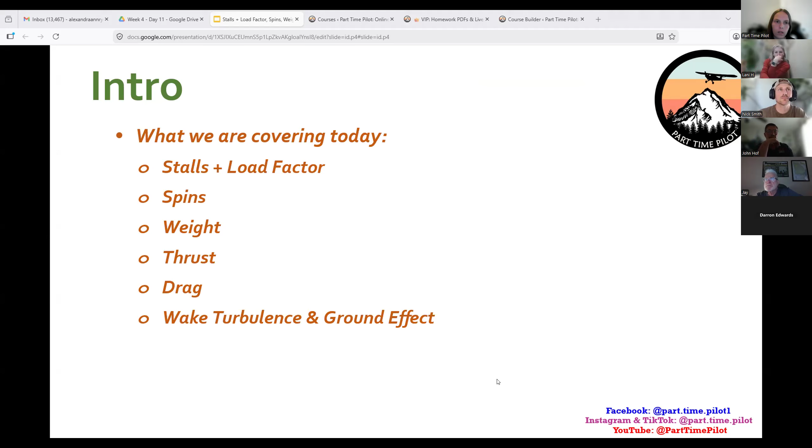While this is true, the speed at which an aircraft stalls changes with the configuration, the bank angle, load factor, and more. Therefore, it doesn't exactly explain what happens in a stall. But a stall occurs when we exceed our critical angle of attack, and to recover from a stall, we have to get an angle of attack that is less than the critical angle of attack, and the critical angle of attack can be exceeded at any airspeed or at any attitude.

And just to recap how we stall again. So we previously talked about the airflow staying attached to the aircraft wing and conforming to the wing shape. And this happens because of the surface friction between the air molecules and the surface of the wing in something called the boundary layer. So that's between the surface of the wing and the relative airflow.

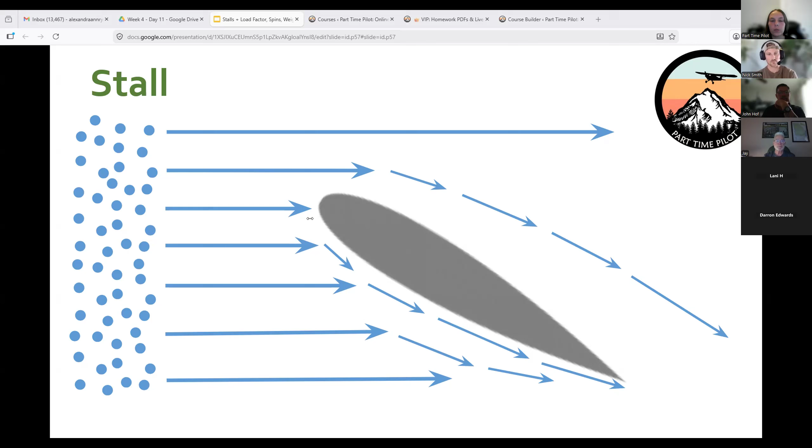And then as our angle of attack increases, the air on top of the wing has to turn an even sharper corner. When it does this, the momentum of the air eventually becomes too much such that it overcomes the force of friction, and the friction just isn't enough to keep it attached to the surface of the wing, and it detaches. And then what happens here is eventually we get to our critical angle of attack, where the air on the top of the wing can no longer stay attached, and it completely separates away from the boundary layer and grab of friction and turns into what we call turbulent flow.

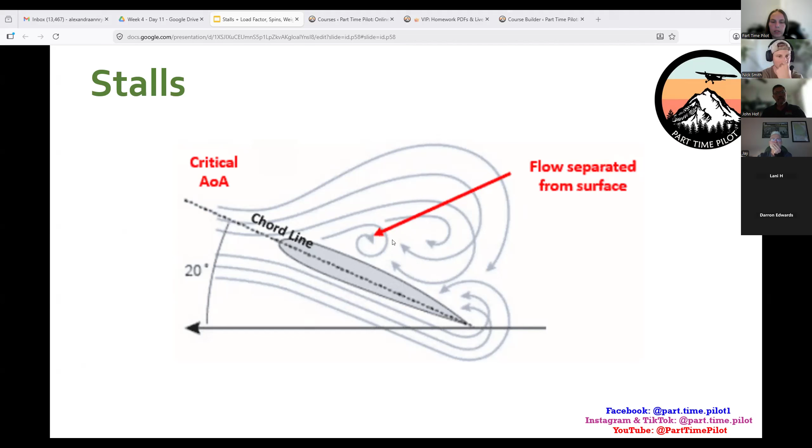And here's that visual depiction again, like we talked about from the other night. So we have our airfoil here. We start pitching up and up until we eventually exceed our critical angle, and then we have the eddies and the turbulent flow there depicted graphically. So are there any questions so far on the recap from the other night?

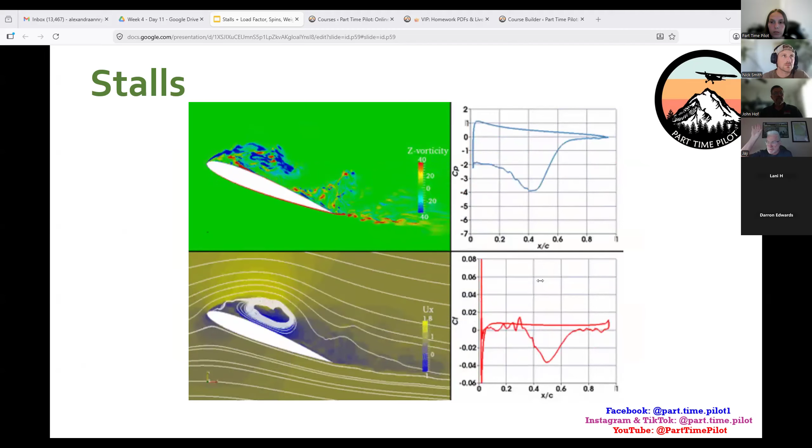I think that top picture in the green there, I mean, it kind of spells it out, because you see the blue when it's in the slipstream, so to speak, and then it just meets that critical angle and it just throws it off. It's pretty wild. Yeah, no, it really is. And if you've ever been up with your instructor doing stalls, it's a pretty fun maneuver to perform.

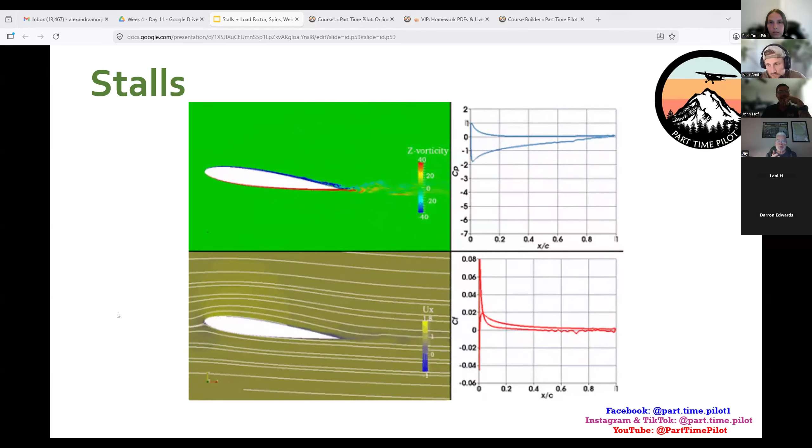Did you have a question, Jay? Yes, quick question, and I think you mentioned it, but you can stall the wing out depending upon speed, weight of the aircraft, but when you reach that angle where it stalls and loses lift, it could happen whatever you're doing to the bird. In other words, whether you're climbing or you're coming in or you're making your turn in for your final, as long as you stay in a stable attitude and you keep the airflow on the wing, you're good to go. But if you violate that, this can happen, and that's bad news.

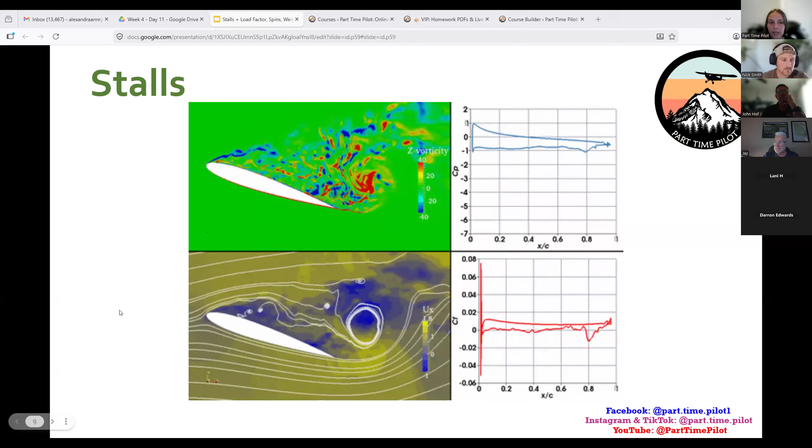Yeah, so if you exceed your critical angle of attack at any point, it doesn't matter, you'll stall the aircraft. Okay. All right, thank you. I'll leave it at that. Thank you. Okay. All right, so now we're going to talk about what John was kind of hinting at earlier with the load factor in our stalls.

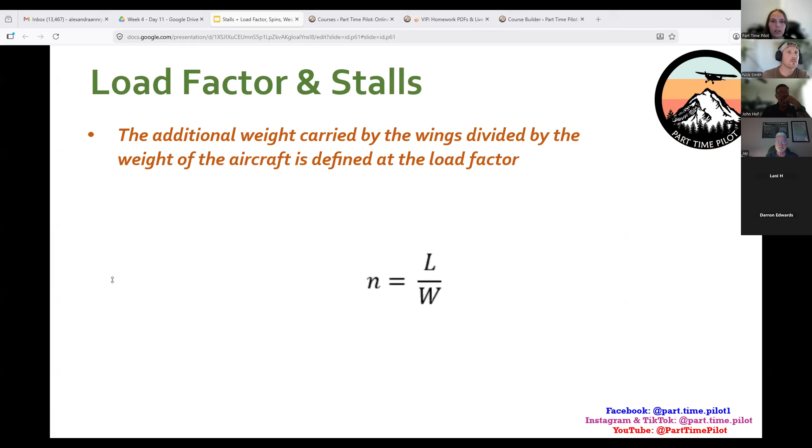And the additional weight carried by the wings divided by the weight of the aircraft is defined as our load factor. And here's a nice equation that we have. Don't worry about the equation, though, or memorizing it. This is just something that Nick added to kind of give a little bit of the why behind load factor. And it relates to load factor, and L is the lift and the weight force is on the bottom. And then the load factor, there's the lift over weight.

Is it lift over weight? Or was it load over weight? It's lift. So N is the load. Yeah, N is load factor, and so the ratio of lift to weight is equal to your load factor or your G forces. Yeah, so this is what you would use to calculate how much G force your aircraft is pulling at the time of your maneuver.

So for this example, if lift and weight were equal to each other, which we would need for straight and level flight, we would have a load factor or a G force of 1. So as you can see, if my lift and my weight were equal, we would have one load factor, or 1 G we would be pulling. But let's say if we increase the lift compared to the weight, the G-force increases. So think of a fighter jet that increases the angle of attack and speeds up. This would increase the lift significantly compared to the weight, and the pilot would feel those Gs.

So I know we'll probably get into this later on in the course, but when we're doing steep turns, for example, that's another maneuver where you feel the load factor a lot. And when you're banking over to 45 degrees, you can feel those G forces as you are doing your steep turns. So in this case, we increased our lift to 10, our weight's still 5, but that doubled our load factor or G's that we're feeling.

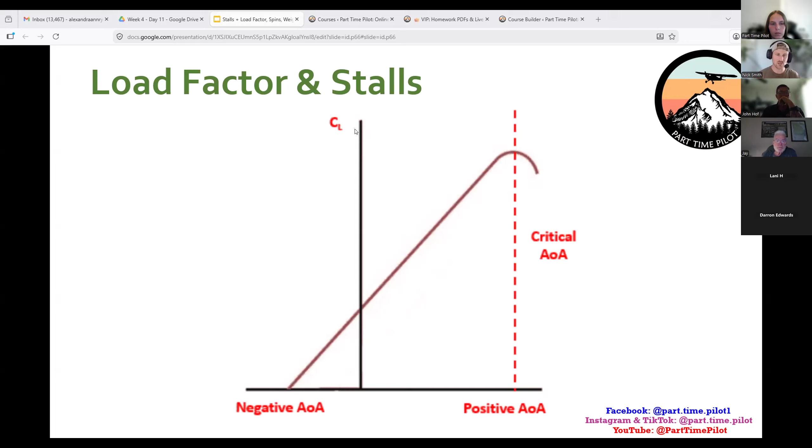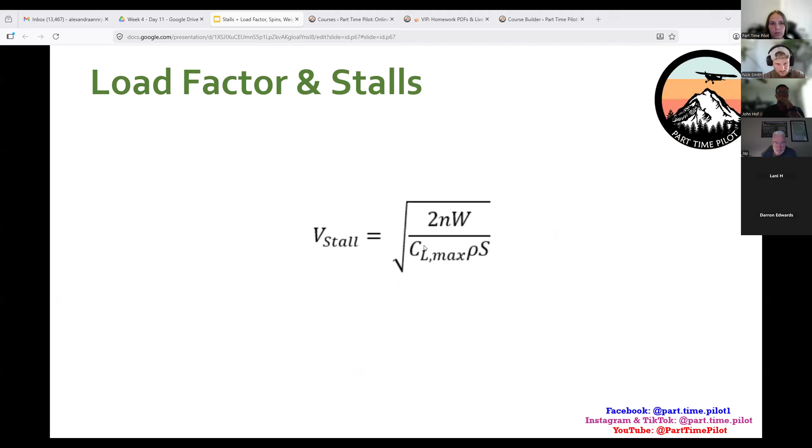So that point at which we reach the critical angle of attack matches up to the point at which we get maximum lift, right? And Ali, if you go back to the equation, 2 slides, I think. Thank you. So there's a CL value in this equation. So if we plug in the exact CL value of the CL max, where we have our max angle of attack, now go forward like 3 slides. So if we plug that CL max in, we get this, and the velocity or the airspeed we get at that exact point is going to be our stall speed.

So remember, VS and VS0, when we have stall speed, it's different whether we have flaps down or not. And the reason why it's different is because that S value on the bottom of the equation changes. When we lower flaps, we essentially increase our wing area. Relative to the wind, it looks like it's bigger because they kind of extend out and extend the wings. So that's why it's different with and without flaps.

But what I want you guys to realize is that our stall speed, now this is an equation for stall speed. It is the speed at which we reach that maximum angle of attack and maximum lift, that CL max. And it's a factor of N. So if N goes up, right? If N goes up, our V stall is going to go up. So the speed at which we stall is going to go up. And so that means if our G forces go up, our stall speed goes up. Yeah, so I think that's it. Ali, actually go to the next slide.

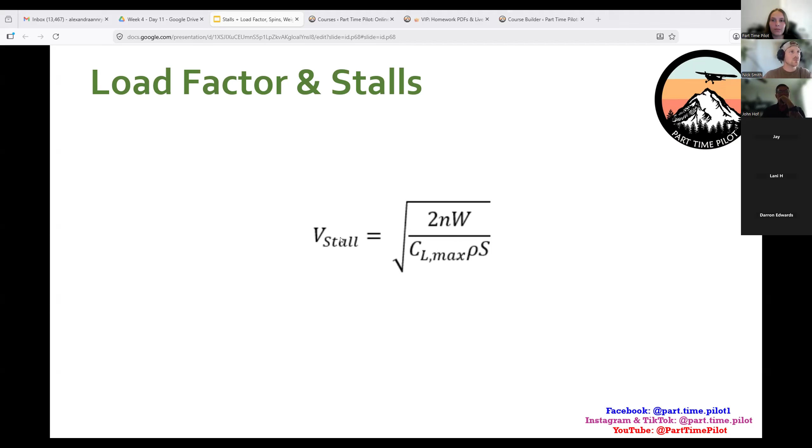So we want to be aware of things that increase our stall speed, especially when we're flying at slower speeds, like during takeoff or landing. A lot of trainer aircraft have a stall speed around 54, 55 knots for VS1. So that's straight and level flight, right? That assumes our load factor is 1. And then that same aircraft will also have an approach speed, the speed at which we want to fly as we come down to land, of like 60, 61 knots. So it's not that far off.

So if we just increase our load factor a little bit, that will increase our stall speed enough. Let's say we're on an approach, and we're 2 knots under, we're a little bit slower than our approach speed, which is very easy to occur. So we're at like 59 knots. And then we have to, for some reason, make a turn, or we get a gust of wind, or something changes our G forces and increases our stall speed to above 59.

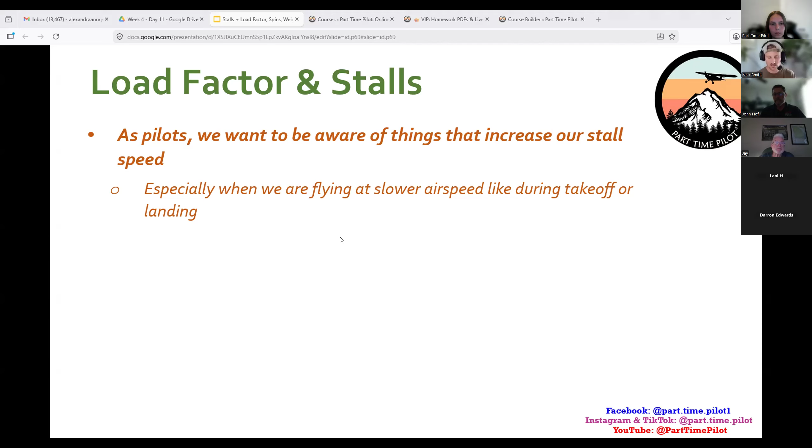That means we are going to stall when we are above our stall speed. We've reached, according to the relative wind, our critical angle of attack and our max lift. A lot of aircraft don't have an angle of attack indicator, but they do have an airspeed indicator. So that's why we use stall speed. And then if you go to the next slide.

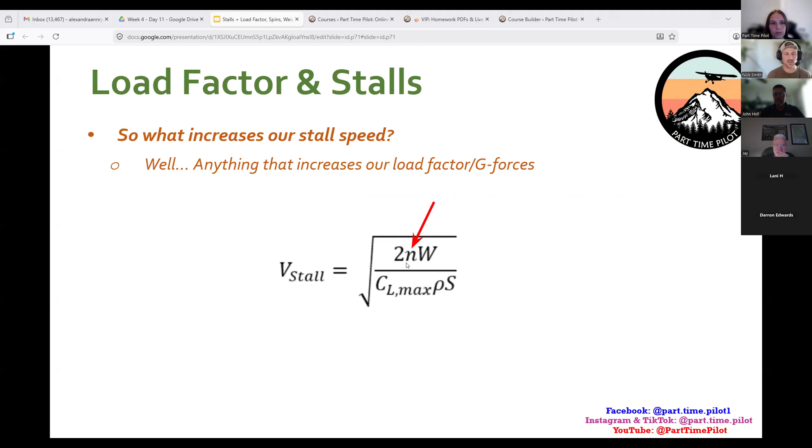So we want to know what increases our stall speed. And then the next slide. I mentioned N already. N is our load factor. That increases our stall speed. And so what increases N? So if you go to the next slide, and then I'll let you take it from here.

Okay. So what increases that is our bank angle. The steeper we bank, the more load factor on the plane. And I remember when I was in school learning this, we had the V speed chart, which is in the PHAK or something. It talks about the different V speeds, but it also talked about the bank angle. Essentially, if you bank all the way over to 60 degrees, you're pretty much doubling your load factor there.

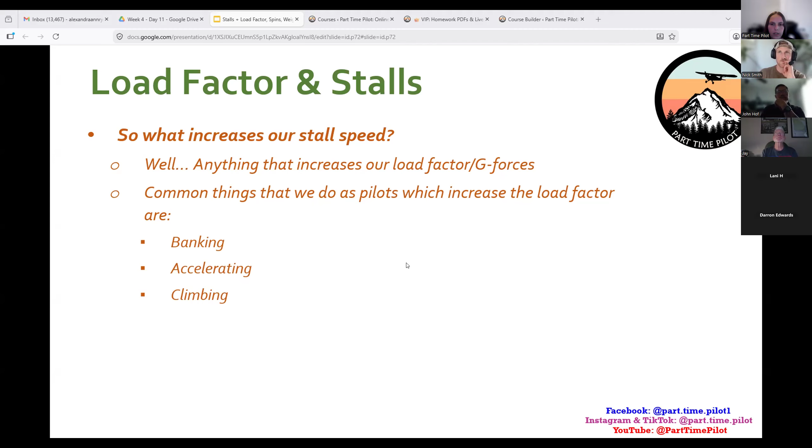Also accelerating. So when you see the fighter jets accelerating super fast, that's going to increase lift exponentially. And therefore, the faster you're accelerating, the higher you might get to the point of your critical angle of attack and where you're going to stall. And also climbing, that's going to increase your load factor too, because you're putting more G's on the aircraft when you're climbing. So that's going to also increase the speed at which we stall.

Yeah, Ali, what do you think the average bank angle range is for a student pilot? So when we're doing steep turns, the furthest we bank to standards is 45 degrees. But I probably wouldn't let a student go past that. If you're just doing stalls, we would usually just keep them wings level where I did my training, and with my check rides, I didn't have to stall in a bank.

I know it's up to 10 degrees of bank. I think you can have the wings banked in a stall. It depends on the DPE, but you can technically do power on and power off stalls in a bank, but I probably wouldn't let them do more than 10 degrees of bank with stalls, because you're further putting load on the aircraft, and if they don't recover properly, you could get into a secondary stall or potentially a spin. So, right.

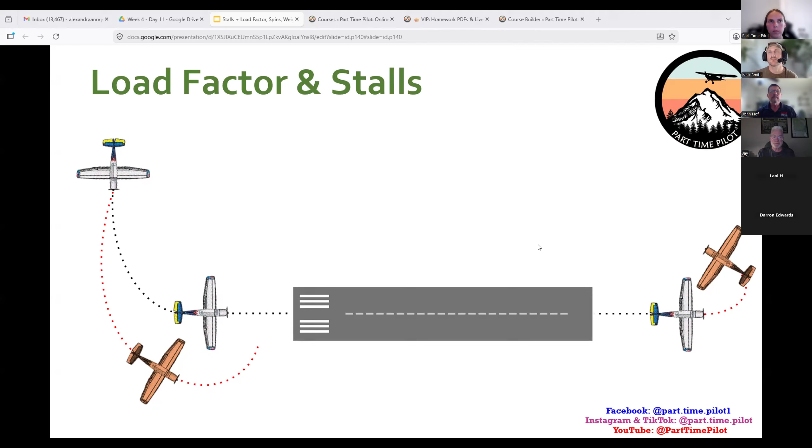Because you're putting more load on the aircraft. You're at a slower speed. You're close to your stall speed. So it gives you that feeling, and it's a very weird feeling. It's a little bit mushy too, especially when you're that slow. So yeah, try and have your instructor demonstrate that stuff to you, and you'll eventually be doing that as well for your primary training.

All right, and then we're going to talk about how to recover from a stall next. So with this example here, when you stall, your stalls start at the wing roots before they propagate outwards, because they designed the aircraft this way to make it easier to recover from a stall. If the wings were to stall at the tips, it would be harder to recover from versus the root.

And so in the turbulent flow of a stall, the control surfaces become less effective. So airplanes are designed this way with the shape and the twist of the wing because it is advantageous that the stall occurs the furthest away from the ailerons, allowing them to remain effective in the stall. If we were to stall out by the ailerons, we wouldn't be able to control them as much, and therefore we wouldn't be able to recover as well. So that's why they've designed the aircraft to stall at the wing root instead of the tips.

And so to recover and prevent a stall, we must reduce our attitude immediately to get below that critical angle of attack and gain airspeed and flow over the wings again. This is done by pitching down. So the first thing you want to do is pitch down to break that critical angle of attack. Then the other parts of the recovery process depend on if you are in a power on or a power off stall. For a power off stall, this is going to be simulating a landing stall. So typically you're going to have full flaps, and you're going to want to disconnect the autopilot and assume manual control if applicable.

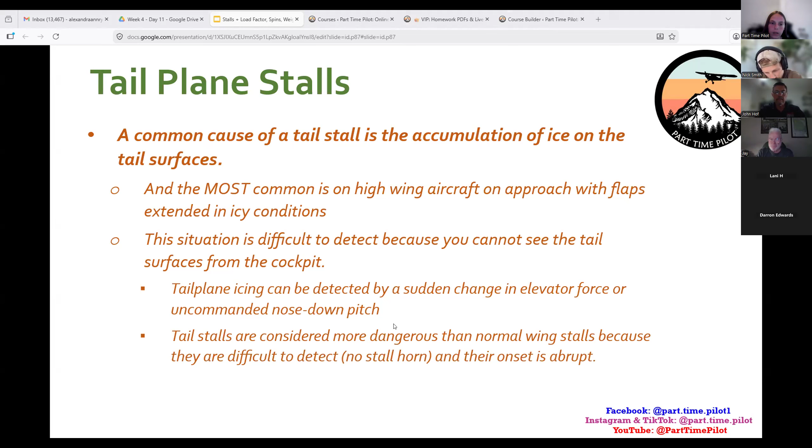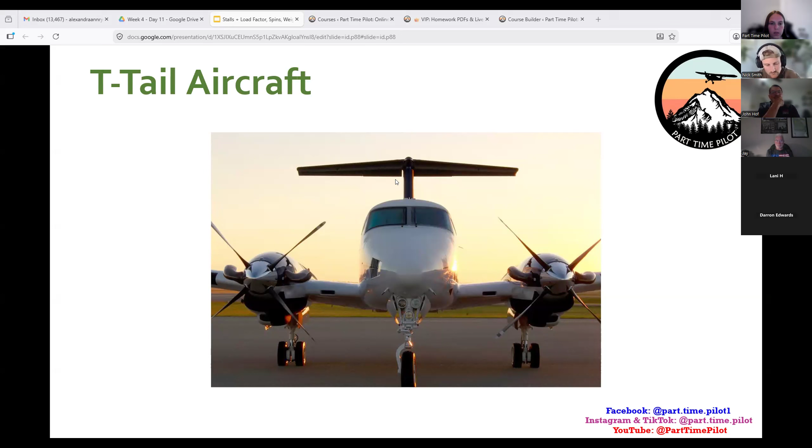In terms of a stall, a T-tail aircraft is more susceptible to entering a deep and more dangerous stall at a higher angle of attack and low airspeeds. This is because at a very high angle of attack, the wake vortices of the wings encompass the T-tail, making the elevator almost completely ineffective. As you can see here, being at a high angle of attack, the vortices are hitting the back of the T-tail and making it pretty ineffective to control. That's why it's very dangerous to stall in a T-tail aircraft, especially a jet, because you might not be able to recover from it. Are there any questions on T-tail aircraft?

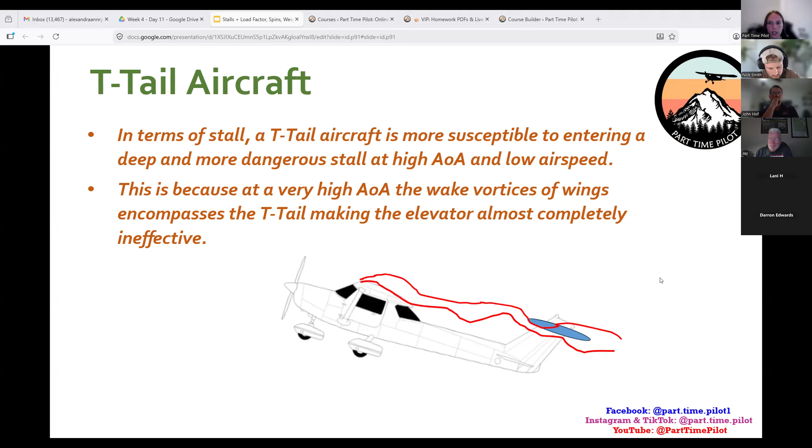All right, next we're going to talk about spins and the difference between a spin and a spiral. A spin is a stall with autorotation about the vertical axis that is caused by a stall plus a yaw simultaneously. An aircraft spiral is a steep descending turn in which the airplane's nose drops and its airspeed rapidly increases as it continues to lose altitude in a tightening spiral.

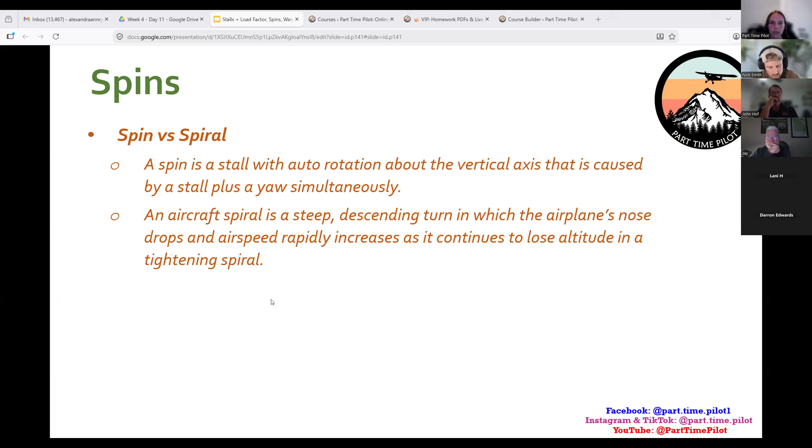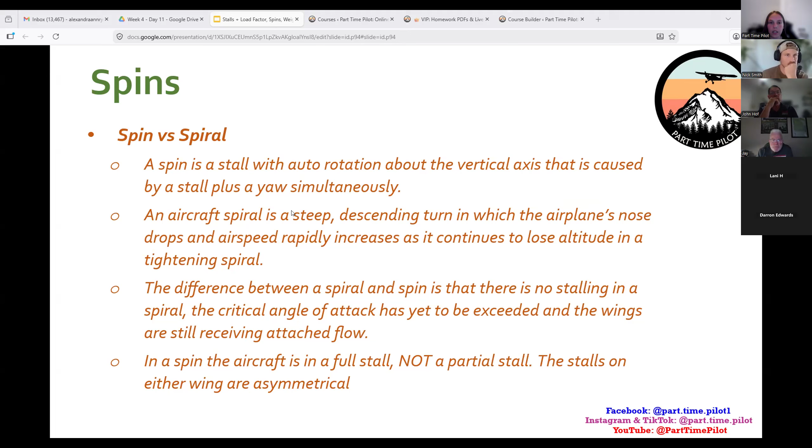The difference between the spiral and the spin is that there's no stalling in a spiral. The critical angle of attack has yet to be exceeded, and the wings are still receiving attached flow. But with the spin, the aircraft is in a full stall, not a partial stall. The stalls on either wing are asymmetrical, and a spin can be entered from any flight attitude and from almost any airspeed. And this is a visual representation of a spin.

If you are going to spin an aircraft for whatever reason, make sure that it's in an airplane that's rated for it, and make sure that you're going up with an instructor who's qualified to do this. You typically won't do spin training in primary flight training. You typically do this once you go to CFI.

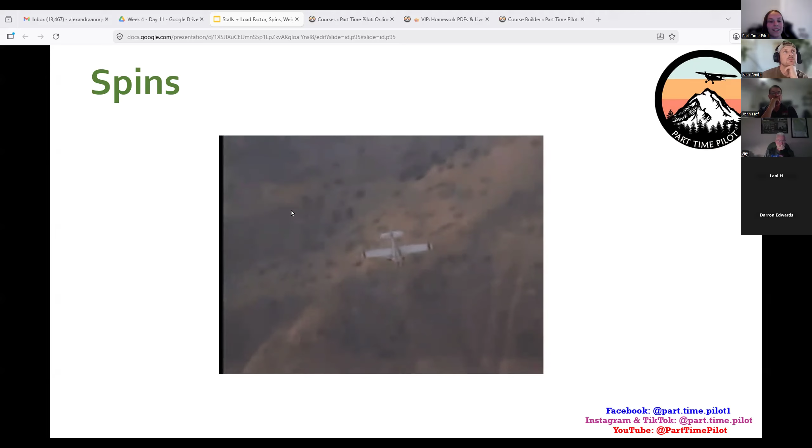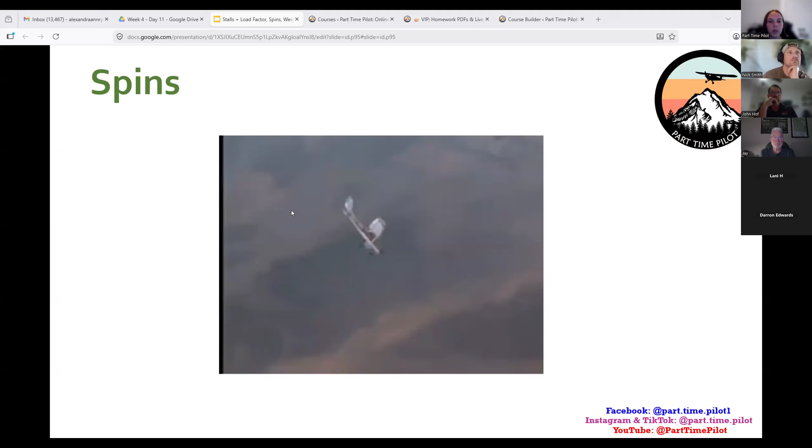When I was in CFI, I had one spin flight and it felt crazy. We were doing them over the ocean because I was in Florida, and I accidentally looked down, and that was the only time I felt kind of sick in the plane, because you feel the G's so much when you are spinning. But most GA aircraft are inherently stable, so they don't want to spin. You actually really have to manhandle these things to spin and put it in some crazy maneuvers.

I do remember from CFI training, if you failed spins or failed teaching spins on the check ride, you'd have to take an airplane that was rated to spin and perform a spin for the examiner. Luckily I didn't have to do that. But yeah, it's really wild. It's a fun feeling, but it is definitely a lot more G-force than I thought it was going to be. And it is very hard to get it into a spin.

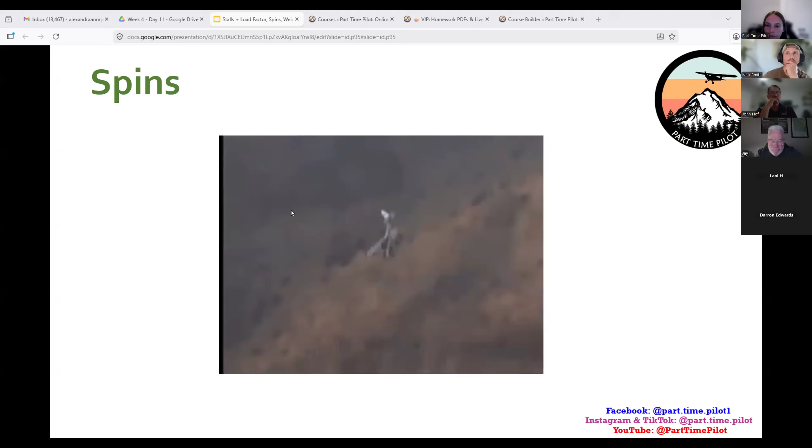Yeah, it'd be wild for spins to be common. It's probably because you only get introduced to spins, like the acknowledgement of spin recovery, because the majority of general aviation aircraft aren't rated for spins. And I think that's why they don't have you spin on the commercial check ride, but you don't have to spin on a private check ride for sure. You just have to know how to recover from a spin. And we'll get to that in just a second.

So we're going to bring back our base to final turn again as another example for spins. This is another common area for a pilot to get into a spin as well as just a normal stall. Unfortunately, this usually ends up in a crash due to the average spin recovery needing up to 1,200 feet of altitude. When you are low and slow, you want to avoid uncoordinated turns at all costs.

So when I went up for my spin flight, we went up to 6,000 feet AGL and we spun there. But yeah, it does take about 1,200 feet, sometimes even more to recover from a spin, depending on how aggressive the spin is. You do lose a lot of altitude when you're trying to recover from a spin. So that's why when we do demonstrate them, they are pretty high up.

And then another time it could occur is after takeoff and the pilot's trying to make a hard bank either to return to the airport or for an emergency. And with back to the airport, that would be that impossible turn like we talked about earlier. So making that impossible turn, you could already be stalled, and then you try and bank harder, then you're going to just spin the aircraft.

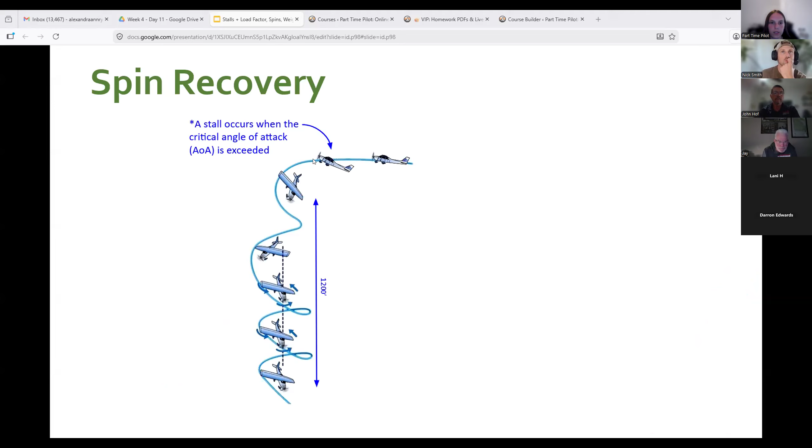And so with spins, all we really care about here is the recovery from the spins. If you, for whatever reason, were in a spin, you'd have the stall that occurs when you're at the critical angle of attack, so at the top here. Then the wings are stalled, and thus the flow over the wing is separated, and that means the ailerons are not as effective as in normal flight, and the nose drops, as you can see here with the plane. And then after that point, the stall causes the nose to yaw, and the yaw and the stall asymmetry causes the auto rotation.

And so to recover, if you're in a high wing aircraft, you'll use the acronym PARE, where P stands for power, and that means you're going to immediately reduce your power to idle. The asymmetry of the stall and the yaw causes the auto rotation of the spin, and the power from the aircraft's propeller is aiding in the rotational speed of the aircraft. Therefore, the first thing the pilot should do when they realize they are in a spin is to reduce the power immediately because we want to stop the rotation of the aircraft.

The next thing you're going to want to do is level your wings. So A is going to be for your ailerons. You're going to want to level your wings with ailerons neutral. Neutralizing the ailerons means to center the yoke with no left or right input. A pilot should not try to bank or use ailerons to recover from the spin because it can just make the spin worse. So that's why leveling your wings and neutralizing your ailerons is good, because we're trying to break that spin, break that rotation.

And then the R here is rudder. What you're going to do is put full rudder against the direction of the spin to combat the rotation of the aircraft. So if I'm spinning to the left, I'm going to want to use right rudder to stop the direction of the spin. So you're going to use full rudder to the floor.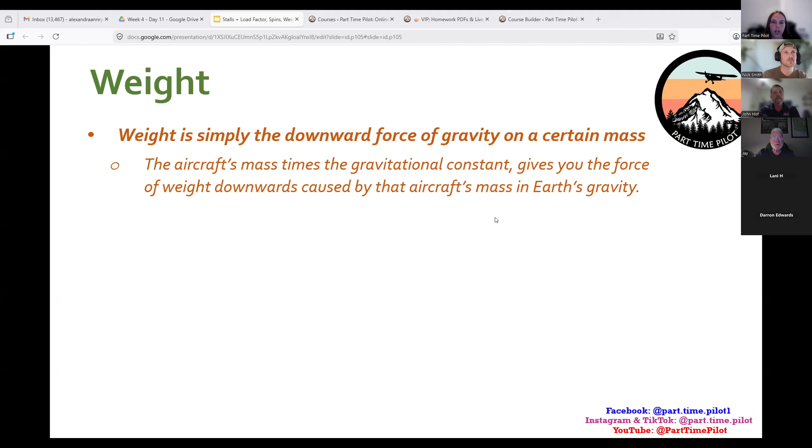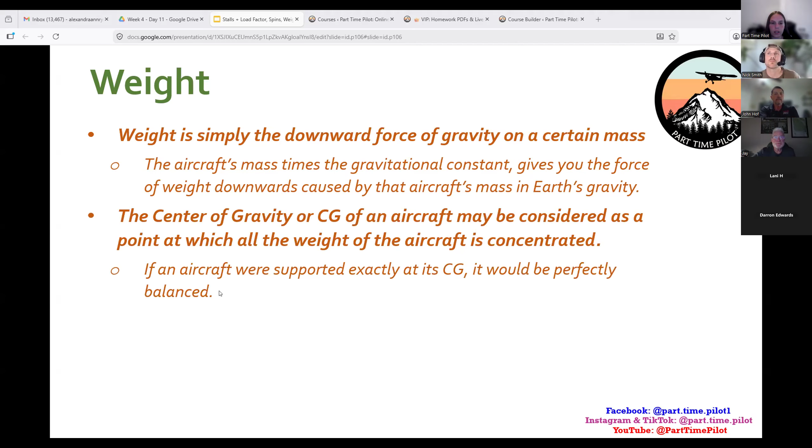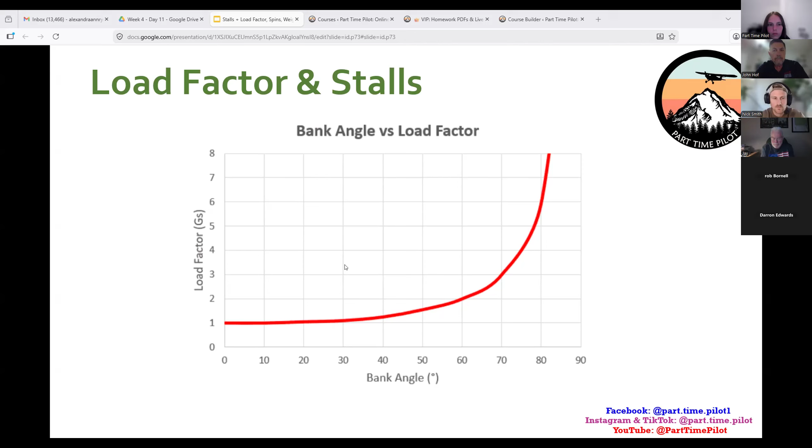I was taking, I think it was the stalls quiz, and then that popped up by like the third or fourth question. Then I stopped taking the quiz because I don't know how to calculate those. Right. I kind of forgot about that one, to be honest. There's a couple of them in there I had to stop and say, well, I'll go back, might be on tonight's lessons. That's a good question. Maybe we'll do a couple examples on Friday after you guys give it a try in the quiz. I'll make note of that for Friday.

So I'm sure those are going to be some of the questions that would probably come up on the FAA written, how to do this. Yeah, I think I remember I got one like that. They're pretty easy once you figure it out. The graph looks intimidating, but it's really not. You just line it up and then you take your load factor and you times it by your weight. Okay, and then John says there's 3 different questions on the quiz like that. We can practice those on Friday too.

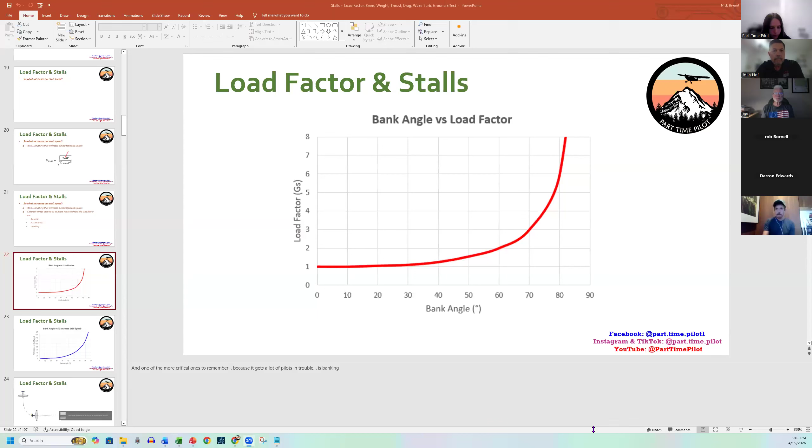So real quick, I know we got time, but since it is on the quiz that they have to do, I feel like we should show them. Can I take over real quick? I just want to do another example. Yeah, of course. All right, so share this here. Can you guys see that? Yes. Okay, cool. John, I think you were looking at the questions. Do you want to tell me one of the questions?

The one that Rob was talking about, and then there's another one that says something about if your plane weighs 3,300 pounds or something, but I forget what you had to calculate. There's three different ones where you have to use some type of formula. One you have to use the square root of the G force, and then I can't remember what you have to do with that. I think you have to multiply it back in or something like that. You said it was in the stalls quiz? Yeah. Okay, I think, is it this one?

If an airplane weighs 3,300 pounds, what approximate weight would the airplane structure be required to support during a 30-degree bank turn while maintaining altitude? Exactly. Okay, so 30-degree bank, and it weighed 3,300 pounds. And it's asking what weight would the structure need to maintain. So basically what it's saying is that in straight and level flight, when our G forces are 1, the structure needs to support a 1G weight of the aircraft.

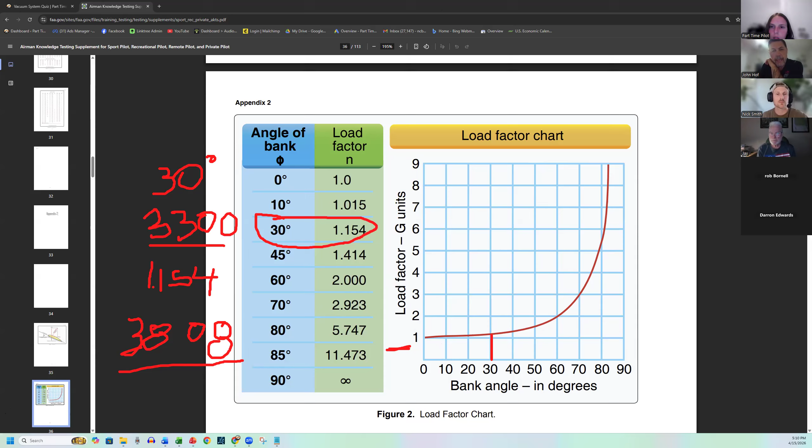Any questions? No, that makes sense. Okay. John, you said, Allie, you're looking at the questions. John said there was one about a square root. Yeah, I'm gonna look for that one too. Let's see. I think it was a square. It was calling for 2Gs, and you had to get the square root of 2. Okay, let me see. What is the approximate stall speed during a 2G load factor bank when the aircraft straight and level stall speed is listed at 50? Is that it? I believe that's correct. Okay.

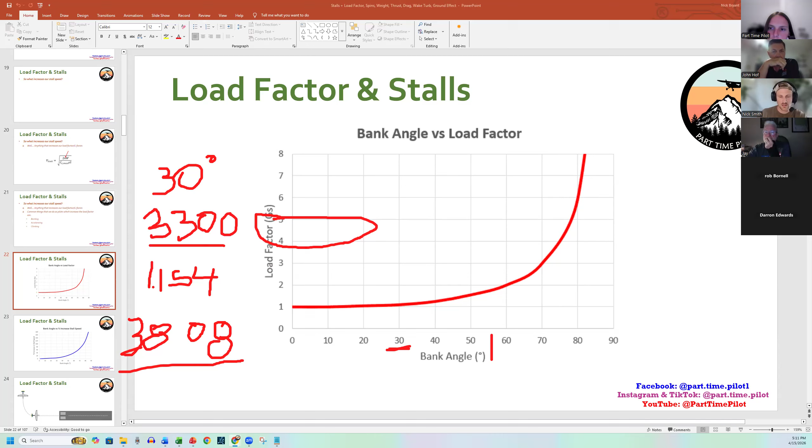You want to? Yeah, I'm gonna pull it. Okay. I'm gonna put it in the chat. Okay, thanks. What is the approximate stall speed during a 2G load factor bank when the aircraft straight and level stall speed? Does it give a figure number? Let me go back and see. No, it doesn't. Okay. What is the approximate stall speed? I'm trying to figure out where we were going with this 2G load factor.

I'll let you continue, Allie, and then let me look into this. I just want to make sure I don't go about this the wrong way. You're good. I'm gonna take a look at it on my end. And then I see the notes, but yeah, that's good. Let me get back to sharing my screen. All right, can everyone see my screen again?

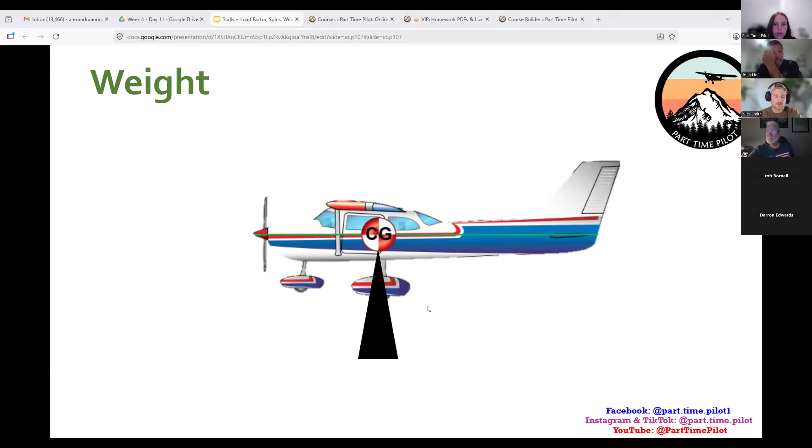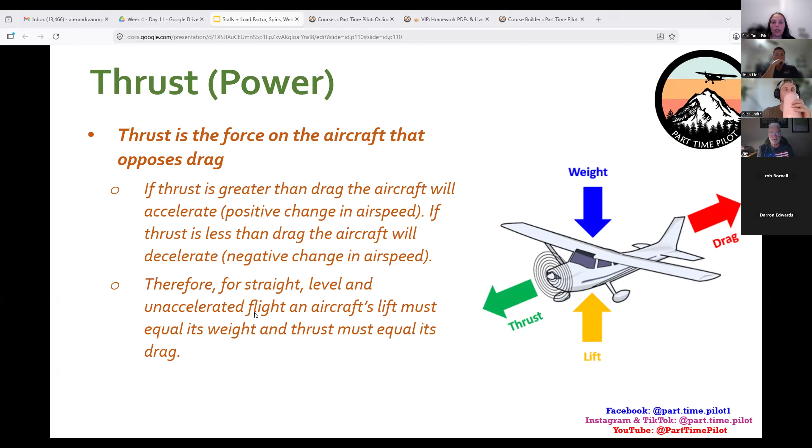And pilots add thrust by adding power and increasing the RPMs on their tachometer. And in each of these cases, you are targeting a safe airspeed and will be taught to pitch for airspeed and change power accordingly. The two always work in coherence with each other.

So if you've ever heard your instructor or someone say pitch, power, trim, you want to pitch for the attitude you want, whether that's straight and level flight, a descent, or a climb. You want to pitch for that first. So once you have the attitude that you want, you keep it at that pitch. Then you're going to add power to maintain that, whatever power setting you need to maintain straight and level flight, or whatever power setting is needed for a climb or a descent.

So in those cases, you may be adding or taking away power depending on the conditions for the day, that sort of thing. So you're going to add power to maintain that position. So that's where the word power comes into play. And then with trim, remember, we are using trim to relieve the control pressures from the pilot. So you're either going to add nose down trim or nose up trim, depending on if you're in straight and level flight or descending or climbing. So whatever you need to maintain that, you're going to add trim as necessary.

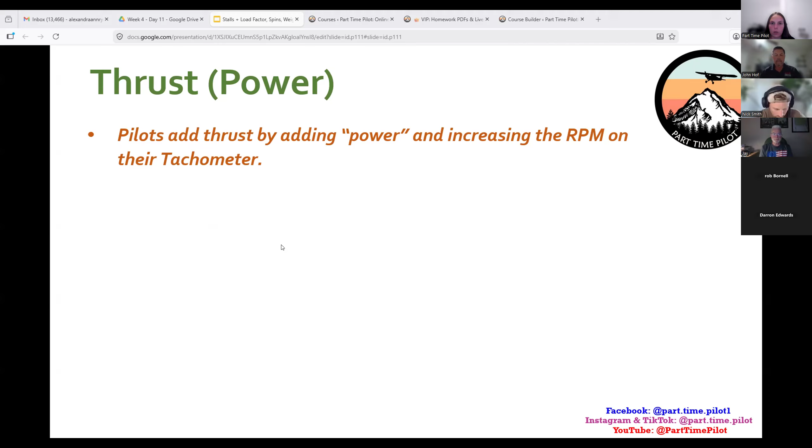So anytime you go from straight and level flight, you're going to need to adjust your pitch, your power, and your trim. So that's just three big things you're going to want to keep adjusting all the time in flight. So unless you're flying straight and level the whole time, you're going to need to make those pitch, power, and trim adjustments accordingly in order to maintain the position that you want.

And the relationship of power and the aircraft pitch attitude is a key concept you'll need to learn during flight training. Like I just said with pitch, power, trim, that's just something that you need to have down, especially when you're first starting out, because you want to make sure that you're able to maintain the aircraft's position depending on the setting you have.

So you may need to add or take away power depending on if you're climbing, descending, or in straight and level flight. And the conditions one day might differ the next day. So the power setting you had that day for straight and level flight might be different the next day based on density, temperature, all that stuff. So just making sure that you really get pitch, power, trim down is so important.

And for every aspect of flying, there is a pitch attitude and a power that work in tandem. So, for example, when you're taking off, you will usually pitch to somewhere around 15 degrees with full power. When you're landing, you will also have a positive pitch attitude in order to slow to your approach speed. And you'll also have a coinciding power, usually about 60% or less of full power.

So usually when I'm taking off, I pitch to roughly about 10 degrees, which is what I can hold at roughly about 70 knots when I have flaps in. And then once I take away the flaps, about 75 is what I like to climb out at once I have a positive rate of climb in my aircraft.

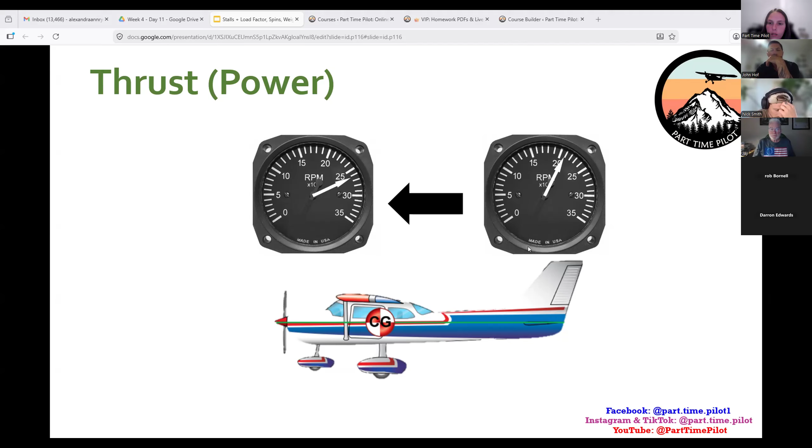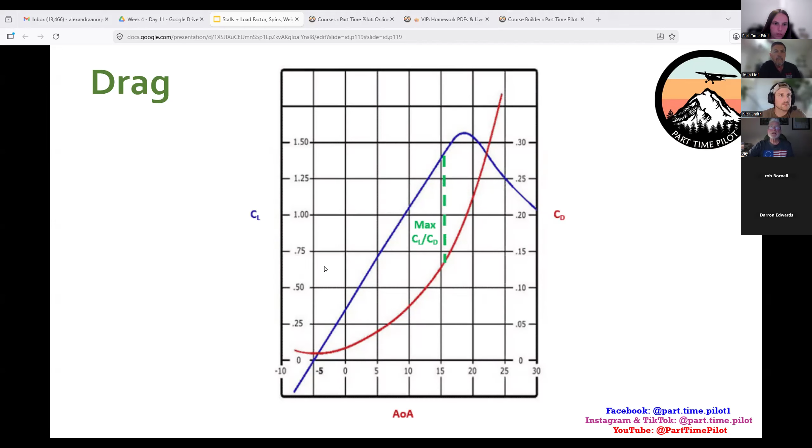With drag, there's two major types of drag. We have our parasite drag and we have our induced drag. Our parasite drag we break down into three types of drag as well: form drag, interference drag, and skin friction drag, which we will talk about in just a second. But remember when we talked about the laminar flow over the wings and how the air stayed perfectly attached to the wings and contoured to the wing's shape? Well, anything that disrupts the laminar flow is drag.

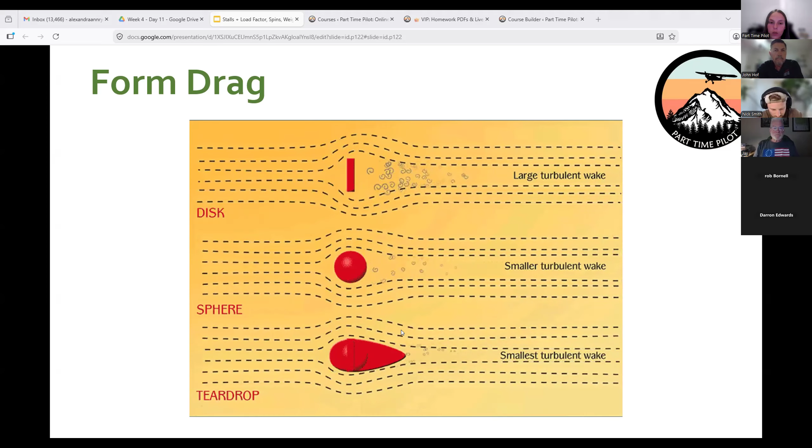Mm-hmm. Yeah. So next time you're in the passenger seat of your car when someone else is driving, stick your hand out the window if it's safe to do so and practice with the hand like this and then like this. So you can really feel the effects of the form drag around your hand.

But anytime you have wind flowing over an object, if it's not smooth and it has hard, sharp lines, the air is not going to flow as smoothly over it as it would if it was a little bit rounded, a little bit more curved. So aircraft manufacturers take this into account when they're designing the aircraft, so that way we don't have as much interference drag from that and causing that slipstream effect.

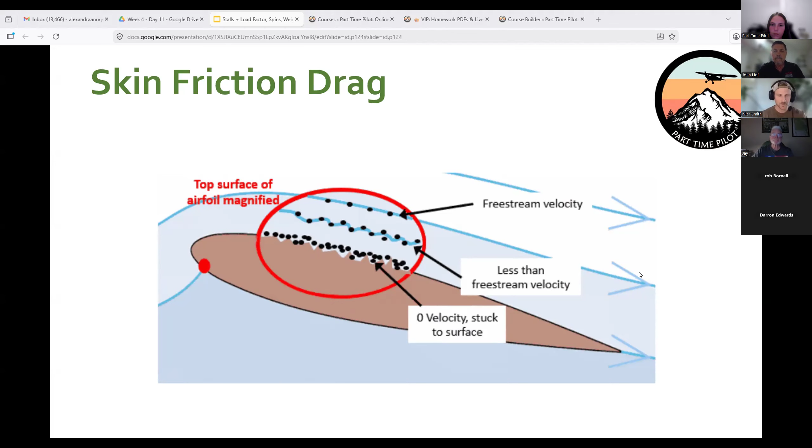And so the last drag we're going to talk about, so we just wrapped up our parasite drag. So now we're going to talk about induced drag, and this is the last type of drag that we have. Induced drag is the drag that's caused by lift, or it's a byproduct of lift. Although aircraft are designed to produce as much lift as possible, this lift comes at a price, which is induced drag. So the more lift that we create, the more induced drag that we have.

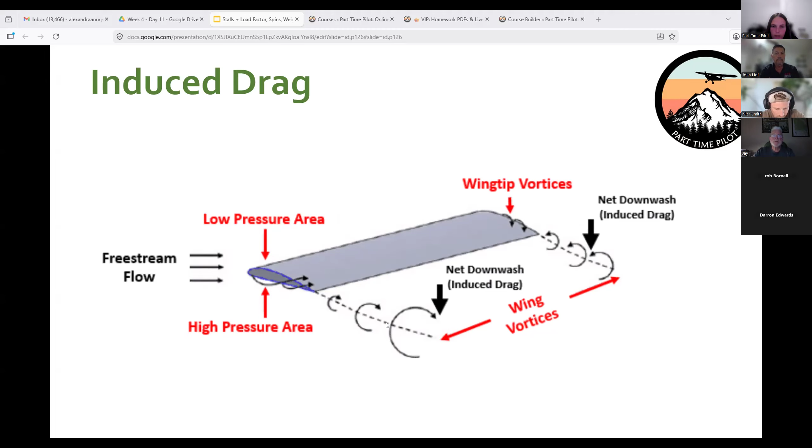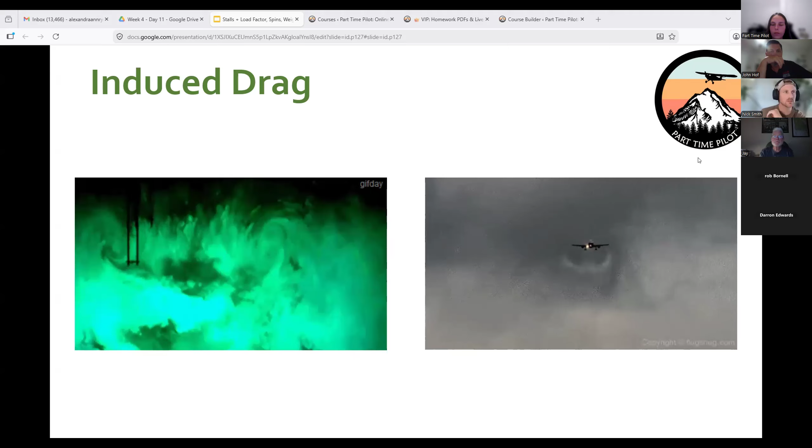Okay, so now... Oh, I was just gonna say, because you're done, right? I thought we had to talk about wake turbulence still. Oh yeah, sorry, go ahead. You're good. I was gonna jump in and answer that load factor question, but go ahead, continue. Oh, sorry. Yeah, we're almost done. So,

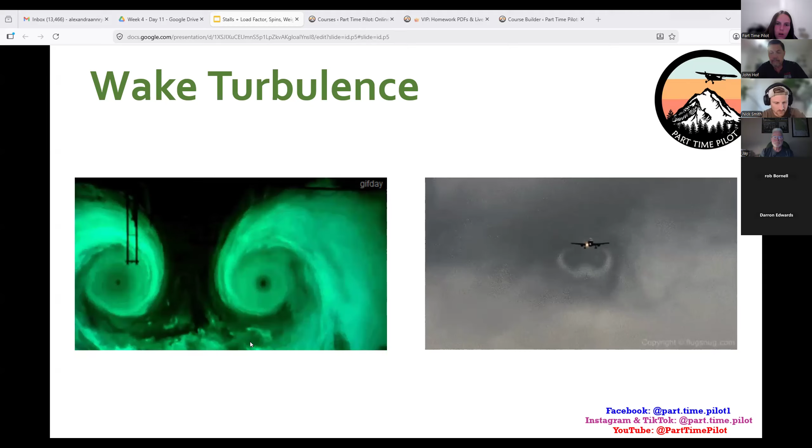All right. To tie in with drag a little bit, we have wake turbulence. Same image here. We have our vortices that the aircraft produces, and with these vortices, we get what's called wake turbulence. The more lift an aircraft generates, the stronger the wake turbulence. And the bigger the aircraft, the more pronounced those vortices are. These vortices are the highest in slow, heavy, and clean aircraft.

Clean just means no flaps or landing gear extended and no payloads attached to the wings like weapons or tanks, that sort of thing. So when you think of clean, it's not like the aircraft's really clean. It just means there's no flaps or gear or payload attached to the wings. Typically for these types of planes, I think of a 787 or 747, really big, heavy, slow, clean aircraft when they're taking off.

And a slow, heavy, clean aircraft happens to be the exact configuration of a large passenger aircraft during a climb out. And so, private pilots, we must be aware of when we're taking off and landing after one of these aircraft because their wakes are pretty big.

And even at smaller airports like my Class Delta airport where I fly out of, we still have jets that come in and out of there. And occasionally we do get 737 traffic because one of the soccer teams flies in there on a 737 with Sun Country. And it's pretty daunting, seeing one of those and then having to take off or land near one. It's crazy. But anyway, we'll talk more about that in just a second.

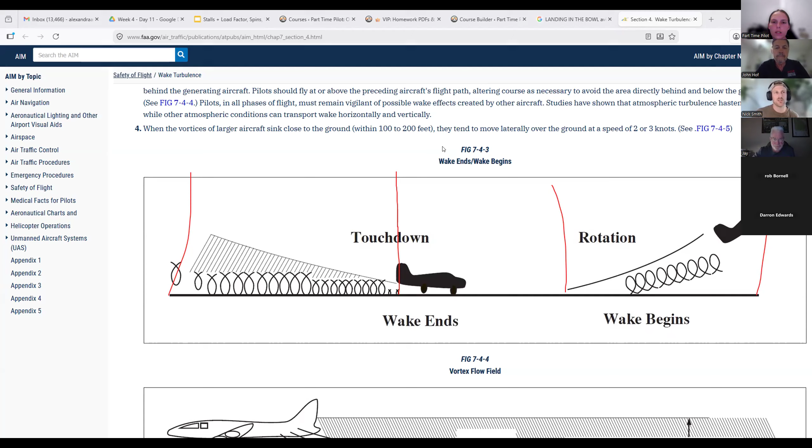Yeah, I think if you keep going through the slides, it'll show each individual one. Let's see. Sorry, I was trying to find a better depiction of it. It's okay.

Here, I kind of drew one real quick. Okay. Share.

So if you're coming in to land after this aircraft here has just landed, you want to land after their touchdown point. And if you're landing before this aircraft here takes off, you want to land before their takeoff point, so over here somewhere.

And then if you're taking off, you want to take off after this aircraft's touchdown point, so somewhere over here. And if you're taking off after this aircraft here, you want to take off before their takeoff point right here. So when you look at your possible approach or takeoff paths, it creates like a bowl above the larger aircraft's approach and takeoff paths.

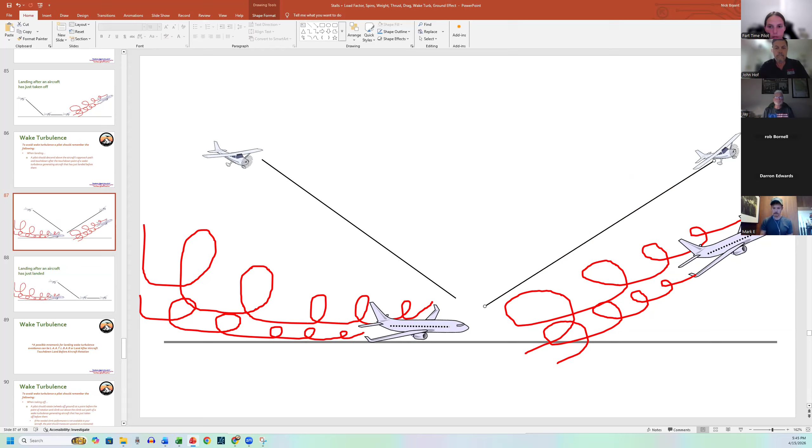Mm-hmm. And yeah, John, you can usually wait the 3 minutes with that one. Usually before you take off, I would wait like 3 minutes. Like if they just said caution wake turbulence, you can say, well, I'm gonna wait a little bit. Or if you're taking off, you can take off, as we just depicted, after their touchdown point, which we'll talk about in just a second.

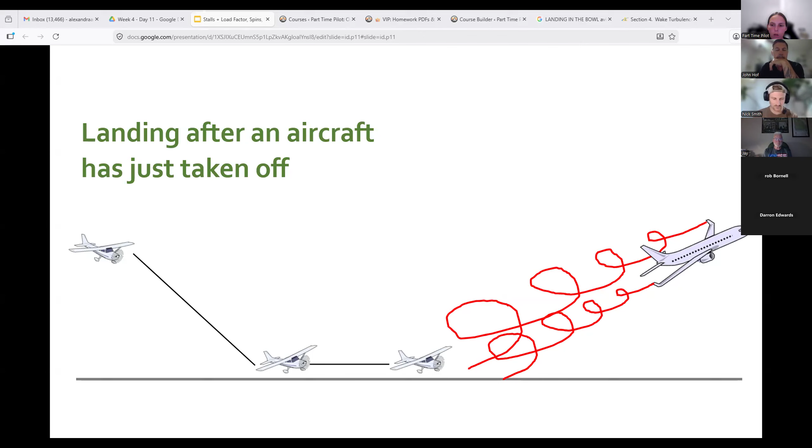But yeah, typically I would do that on takeoff. I mean, you can do that with landing too. You could just circle or wait the 3 minutes, like hold somewhere. But yeah, typically that's what I would do there.

Sorry, I just stopped sharing for a second. I'm trying to figure out my screen. It was all funky.

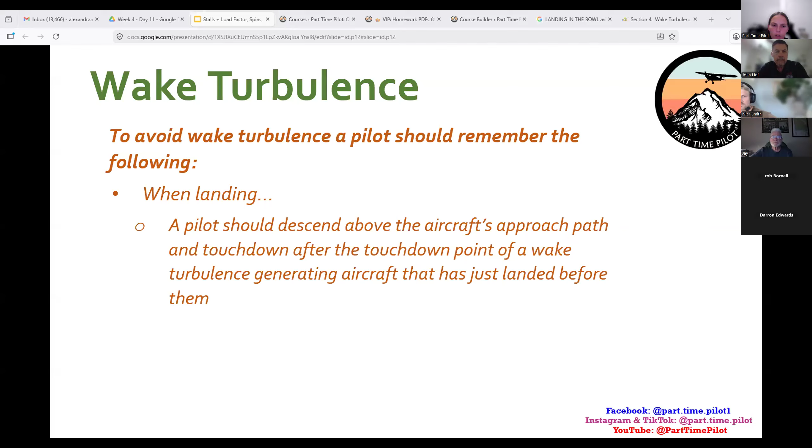Yeah, with ATC, it might look a little daunting to land in this type of situation, John, but honestly, when I've been cleared to land and they say caution wake turbulence, it's not terrible as long as you follow the steps. If you're coming in to land and the aircraft's taking off, landing prior to their rotation point, or landing after their touchdown point, it's not too terrible.

There's been some times where you can feel it a little bit if there's a bigger jet, but honestly I haven't really had too much of an issue with landing with wake turbulence. But it can be a bad time, like Darren's saying, that's crazy what happened with your friend. If you're not doing the proper technique, it can be a bummer, but as long as you're following the procedures properly, you'll be fine. Or just waiting it out is always a good idea as well. All right.

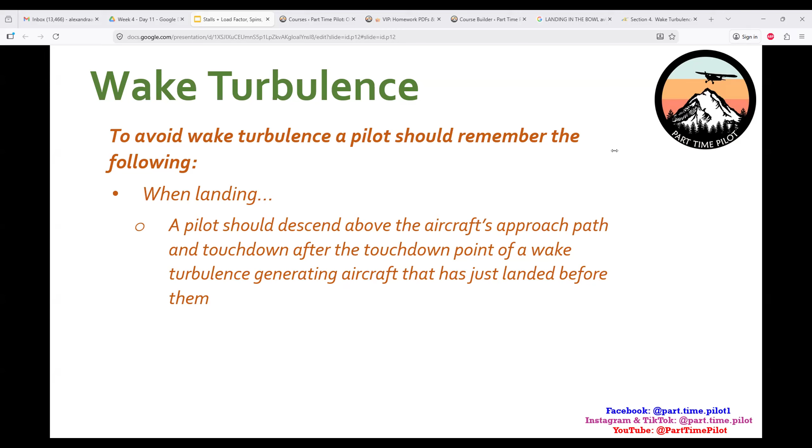And then, when landing, a pilot should descend above the aircraft's approach path and touch down after the touchdown point of a wake turbulence generating aircraft that has landed before them. So, like we just talked about, landing after an aircraft has just landed, you want to land after their point of touchdown.

A possible mnemonic for landing wake turbulence avoidance can be LAATLBAR, or land after aircraft touchdown, land before aircraft rotation. That one's really good. I never really had a mnemonic personally when I learned this. I just kind of remember the bowl, like stay within the bowl. Better. The bowl's better. It's way better.

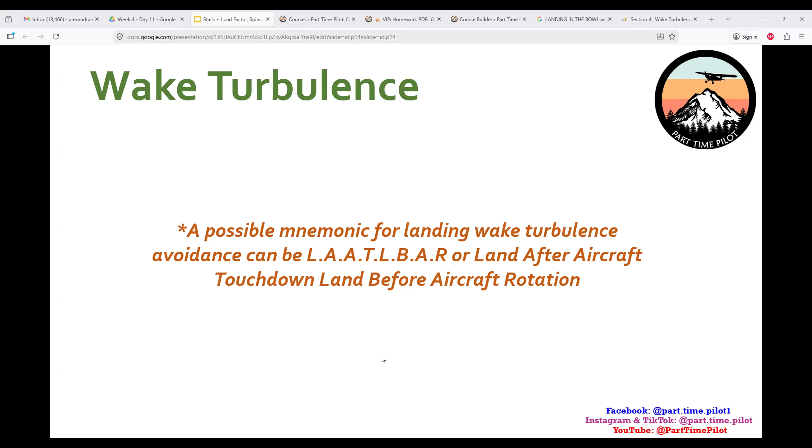Yeah. So for me, I just learned, if you're coming in to land and they're taking off, land prior to their point of rotation. If you're coming in to land and the aircraft is landing, landing beyond their landing point is also good. But the bowl method I think is really good. So are you sacrificing? Okay. Yeah, you're not really. Depending on where you're at, you should have plenty of runway. Usually it's not too bad.

So now we're going to talk about avoiding wake turbulence when we're taking off. A pilot should rotate, so have our wheels off the ground, at a point before the point of rotation and climb out above the climb out path of a wake turbulence generating aircraft that has just taken off before them.

And I don't know about you, but if it's a really big aircraft, like a 737 or a 747, thank goodness we don't really have 747s at a Class Delta airport where I'm at, but realistically there's no way you're going to be able to climb out of some of these aircraft. So for me personally, I like to just wait the 3 minutes or however long. Sometimes ATC will just hold you and make you wait if they suspect wake turbulence at a towered airport. If you're at an untowered airport, I would just wait 3 to 5 minutes. It's always better to wait than take off and have to deal with that wake turbulence.

But if it's a smaller jet or a smaller plane, if you're going to rotate, rotate at the point before the point of rotation, and climb out above the climb-out path of the wake turbulence that the aircraft before generated. And if the needed climb performance is not available in your aircraft, the pilot should avoid maneuvering upwind in a crosswind from the heavy aircraft takeoff point, or just wait the 3 to 5 minutes before you take off if you are able to do that.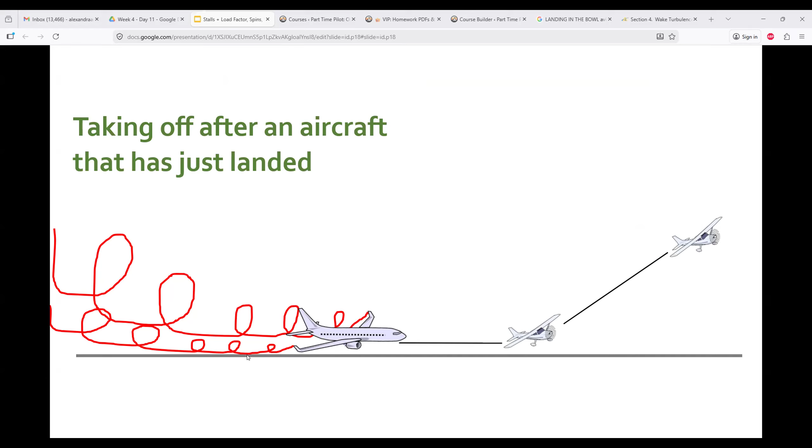And this one makes more sense, and it's definitely a lot more doable than the takeoff one. I would personally just take off after their landing point in this case, because you're not fighting that wake behind you and you're not having to climb out at that steeper angle, depending on your aircraft performance. So you can either choose to wait the 3 minutes or you can just take off after the touchdown point. It's up to you. But in this case, as long as your aircraft has the performance, I would just rotate after the touchdown point for the takeoff.

And then we've got another mnemonic here, which is TAAT: take off after aircraft touchdown, and then take off before aircraft rotation. So these are the ones that I made myself when I was learning these, before I heard about the bowl. So I say TAAT, TBAR. I came up with whatever I could to remember all this stuff over the years, and I think it's really helpful. So whatever works for you, throw that in there, or the bowl method, which I really like.

Yeah, I don't know what the heck I did to my screen. I zoomed out. Okay, there we go. All right.

Okay. And with wake turbulence, the vortices are affected by winds just as an aircraft is affected by winds. So let's say you're on the runway and there's a left crosswind: a pilot can expect the vortices of a large aircraft to be pushed to the right of the large aircraft's path. And so when the winds are heavy, the wake turbulence doesn't linger near the runway for very long because the wind pushes it away. When the winds are light, the vortices stay around longer.

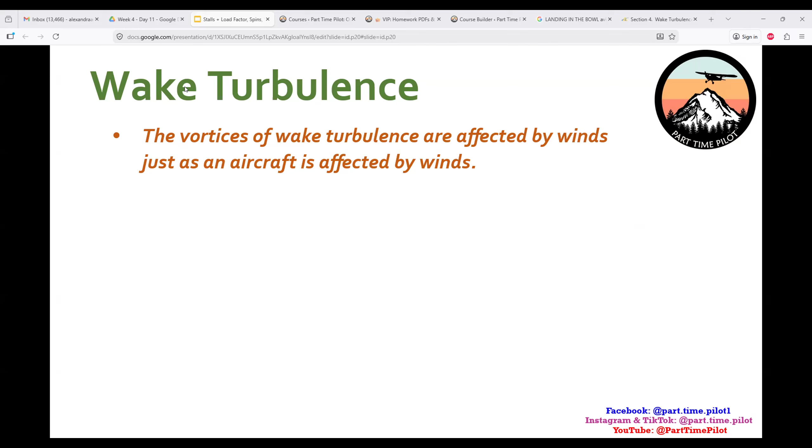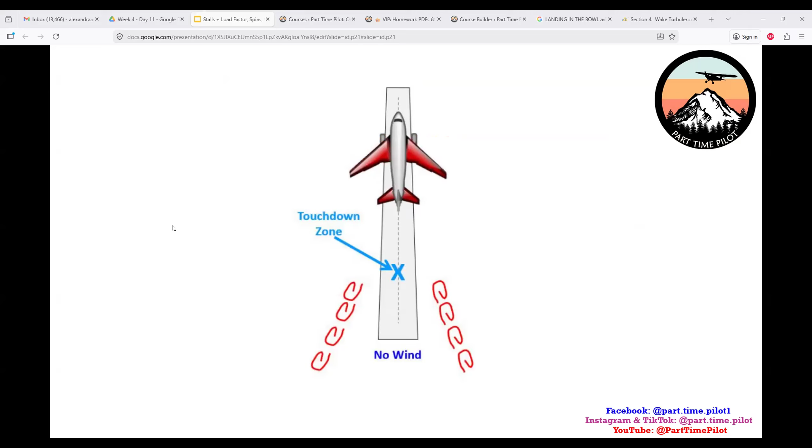So with this example here, if we had our touchdown point here and there's no wind back here, but we have the vortices here. If we have higher, gustier winds, and the vortices are coming from the left, then they're going to dissipate to the right. But if the winds are light, they're going to stay on the ground for a longer period of time.

And if we have a tailwind in this case, and we just took off here with our aircraft, especially a quartering tailwind, as you can see, those vortices are going to be dissipated onto the runway.

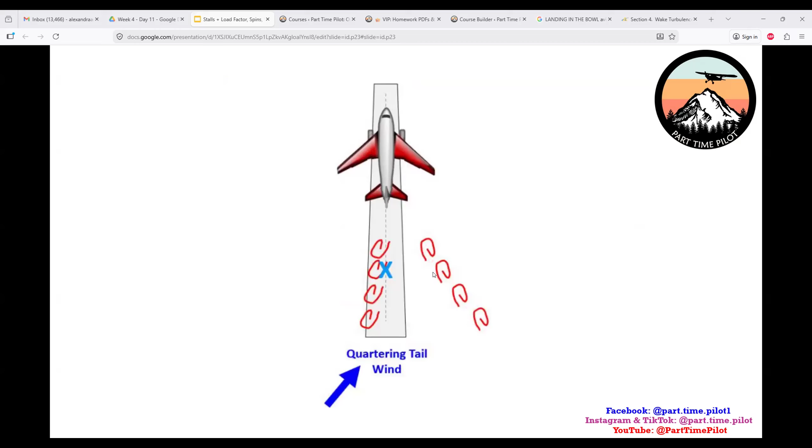If they're coming from the left, like this left vortice here is going to come with this quartering tailwind, it's going to dissipate towards the right and stay on the runway longer. And this can especially be a problem if we have parallel runways and a crosswind, because the crosswind will blow the wake onto that adjacent runway.

So you're going to have a right crosswind, but then you're also going to have this aircraft's left vortice be pushed into your flight path. And so in this instance, what I would personally do is I would wait the 3 minutes before taking off, because you're battling a crosswind, and then you're also battling the vortices too. So personally, that's what I would do. I would wait before taking off.

But if you did want to take off for whatever reason, you would just use the avoidance procedures we talked about earlier. And earlier we mentioned that if your aircraft doesn't have the climb performance to climb above the climb path of the aircraft in front of you, to turn upwind. And so if we're taking off behind this aircraft on 27 right, what we mean by upwind is into the crosswind.

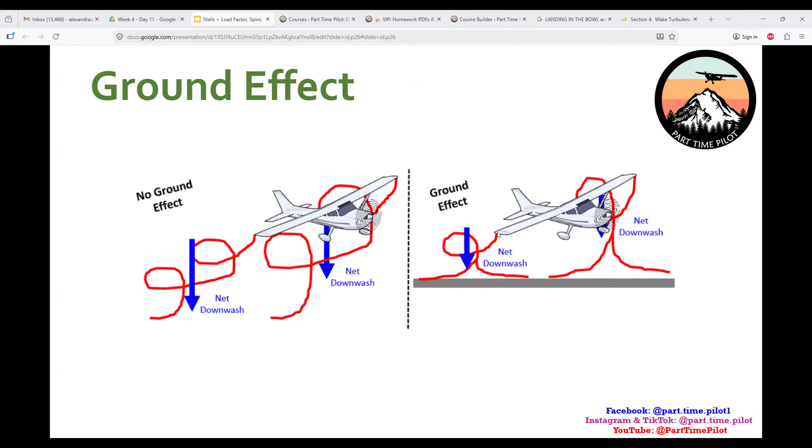So ground effect as a general rule doesn't come into effect until you're at a height above the ground equal to your aircraft's wingspan. So we don't feel this when we're flying straight and level or up at altitude. We feel this when we're about a wingspan from the ground. So at a height above the ground equal to your wingspan, ground effect starts to reduce induced drag, about 5% of your total induced drag, giving the aircraft more net lift.

And at a height above ground equal to half the wingspan, ground effect reduces induced drag by about 10 or 20%. At a height equal to 1/4 of the wingspan, it reduces induced drag by about 30%. And at a height equal to 1/10 of the wingspan, it reduces induced drag by 50 or 60%. Even a 10% reduction in induced drag can allow an aircraft to be airborne at an airspeed of 2 to 3 knots less than normal.

And we need to be aware of ground effect during both takeoff and landing, because with landing, the decrease in induced drag means that any excess speed we have on approach and flare will cause considerable floating. And if you continue like this, it will likely lead to a very rough landing, if not one that damages the aircraft or causes injury, or a go-around.

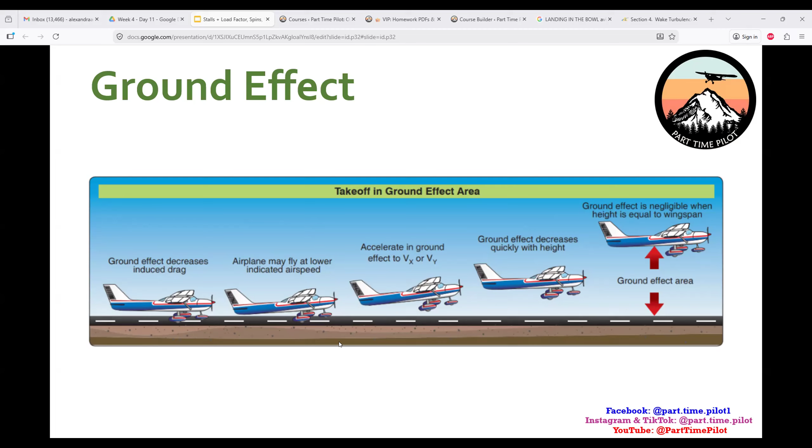And so the video that's next, I actually pulled that up, Ali, so I can share that on my screen so we can watch it together.

It's kind of lagging and it stopped. Yeah, I stopped it. Oh, okay. Sorry.

So that's just one. The ground effect can help us, but it can also be a danger if we don't understand what it's doing. And then while I share the screen, let's see if there's any questions, and then I have that load factor question that I want to show you guys. I think it was Rob's question earlier. Are there any questions on ground effect or wake turbulence?

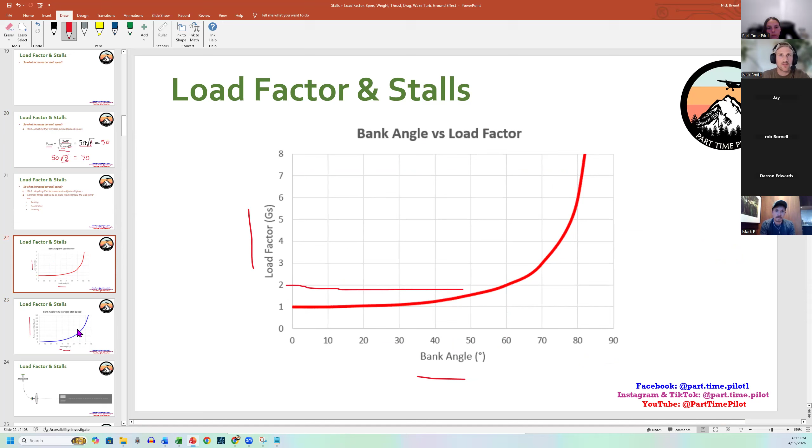So if you also look at this chart, this chart said bank angle and increase in stall speed. First let's look at this one: load factor and bank angle. In this example, we said load factor of 2. So if we look at this and we say, okay, load factor of 2, at what bank angle do we get that? Well, we get that all the way at a bank angle of 60. All right, so then if we look at this one and we say, okay, bank angle of 60, how much percentage increase in stall speed does that give us? It's about a 40% increase.

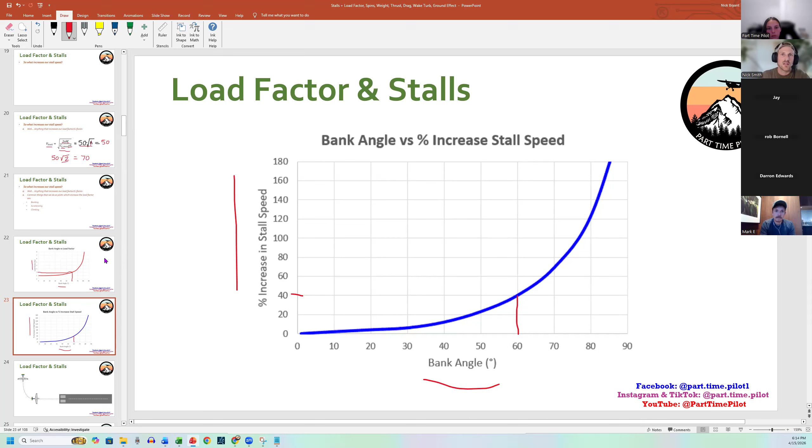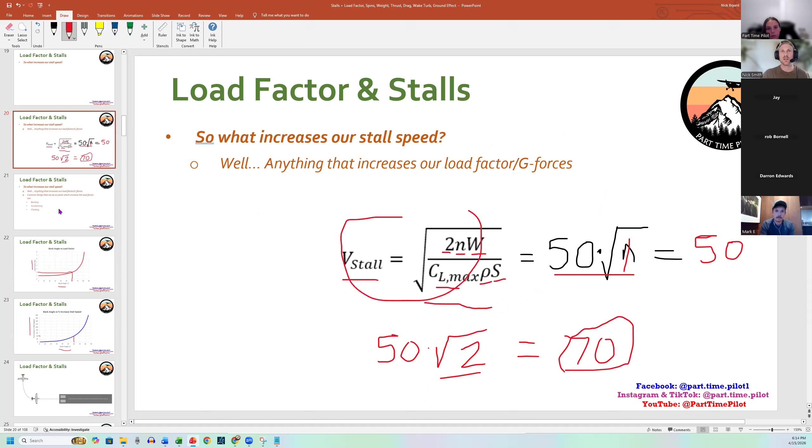So if we add 40% to 50, that's the same thing as multiplying by 1.4. That's going to give us the same thing. So the square root of the load factor multiplied by your stall speed is just these charts. It's just a shortcut for this chart. And the way they get this equation is from this equation. Hopefully I didn't completely confuse you guys.

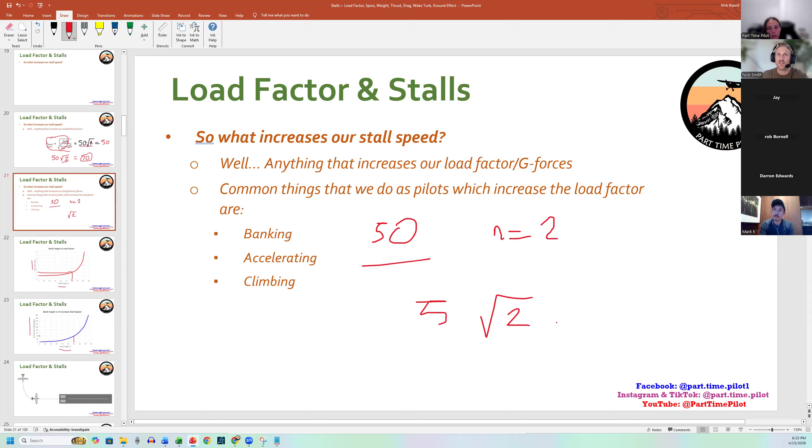Just remember, if they say stall speed is, like I said, 50, what is the estimated stall speed at a load factor, or N, of 2 or whatever they say? You just take the original stall speed and multiply it by the square root of the load factor, in this case 2. So 50 times the square root of 2 to get your answer. So that's how you do those.

And I apologize. I'm going to go review the lesson and make sure that's in the lesson in the ground school. I've added to the notes to do it, just to make sure we explain it, because it's possible you could get this on your checkride. I don't think it's on the written exam, but it is still good to know.

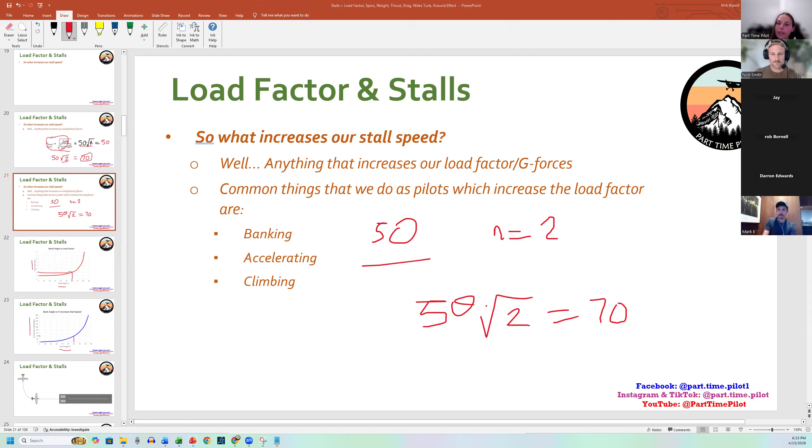Are there any more questions about the lesson tonight in general? Just out of curiosity, when you're talking about the graphs, I noticed in the tests that we do online through Part-Time Pilot, generally, let's say the answer is 52, it's not 51, 52, and 53 as the options. I'm guessing the FAA is not checking our math, but more that we have the concept. Is that a correct assumption? Yeah, if I'm getting your question right, they want you to get the answer of the problem, but they want to know that you know the concept too. That's what the written is testing, your knowledge of the subject areas. Is that what you're asking, Lonnie?

What was the question? Sorry, I missed the start of it. So I've noticed that when there's a test about one of these graphs and the answer is 52, you're not making sure we have our math down to a science. We're able to use the graph and get an estimate without doing the full interpolation. There aren't options like 51, 52, 53, like you might see on a math test, to make sure you're getting the exact answer. It's more the spirit of it, understanding. So you might have like 72, some of the low-hanging fruit on there. You're kind of breaking up. So as long as I was in the ballpark, I was kind of okay.